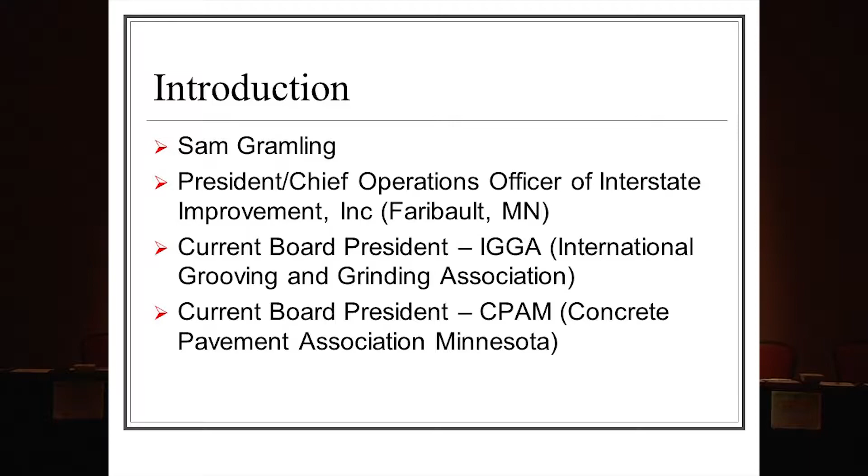As she mentioned, right now I'm the president and chief operations officer for a company called Interstate Improvement, we're located out of Faribault, Minnesota. I have had the honor and the privilege to work with almost every DOT that's represented here, I think with the exception of maybe Kentucky and Tennessee.

I'm kind of pulling a little bit of an audible on what I was originally going to discuss. I have a rather lengthy slideshow here of do's and don'ts on concrete repair, but to be honest, I stole pretty much the entire slideshow from the IGGA. The IGGA is actually represented here for the rest of this week with Mr. Larry Schofield, who's not in the room right now, but we'll have an exhibit set up across the hall there, and he's kind of the show pony for that sort of stuff. I'm not, I'm a contractor, so I'm a little more deliberate and straight to the point.

So what I really want to do here is breeze through a lot of these slides and probably just click through them before you even get a good look at them. I can make this presentation available to anybody that wants it. Tonight after I'm done, I plan to sit with Mr. Schofield over at the IGGA table if you have any specific questions pertaining to the kind of work we're looking at doing.

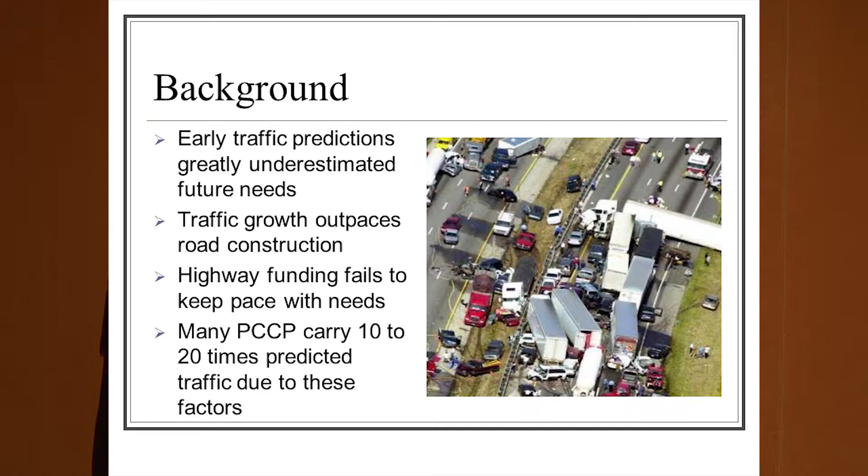Just a little bit of background, kind of the theme of what everyone's been talking about here so far. Obviously our infrastructure, we greatly underestimated our future needs. We're left with what we're left with right now. Our growth is outpacing what our road construction is able to do. Our highway funding fails to keep up with the needs that we have, and we're carrying a lot more traffic for a lot longer than what was anticipated.

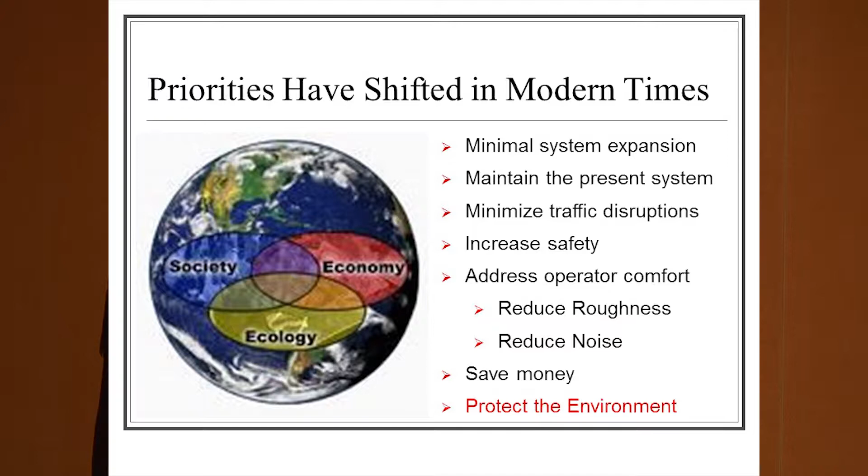We've seen a shift over the last few years in terms of what is prioritized for certain projects. The message I want to get across is that when it comes to concrete repair, we're fairly undermatched compared to asphalt and other aspects of our industry as a whole. But we are not absent at all in terms of how these priorities have shifted, and we certainly can provide certain things we need to do: increased safety, added operator comfort, save money, protect the environment. These are all focuses we're pursuing as an industry, as well as some of our competitors.

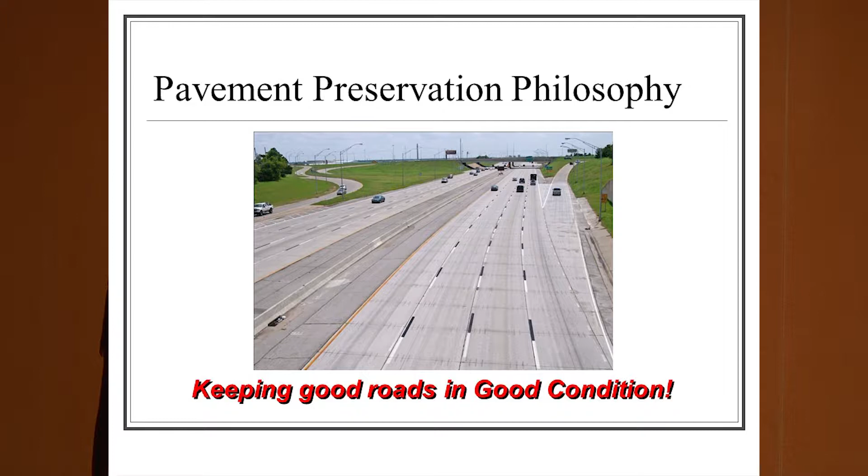The big thing here is that pavement preservation philosophy is keeping good roads in good condition. If you were to reach out to myself or most of my competitors, and they tell you they can fix every road with these techniques, they're lying. It's that simple. These are techniques that are very specific to certain types of roads and at certain points in their life cycle.

So if you have questions, what I'm urging everyone to do is reach out to myself, to my competitors, to the IGGA, to the local ACPA chapter, and ask these questions during the design phase. Ask them early and ask them often: hey, I have a specific project I'm looking at, and I want to know if it's a good candidate for concrete repair.

I've been to dozens of places around the country, meeting with dozens of engineers well before there was even a project that existed. And I've walked out with some of my competitors, and it pains me to say, who are equally as capable as I am or my company is. We've physically walked the roads and been asked, well, what would you do here? What do you think about this? Can we do something like that?

Simple questions like, looking at this road, what are some things you guys could suggest that would save us money but still give us the end result we're looking for? Still give us that 15, that 20-year fix. And we're more than happy as an industry to certainly explain that.

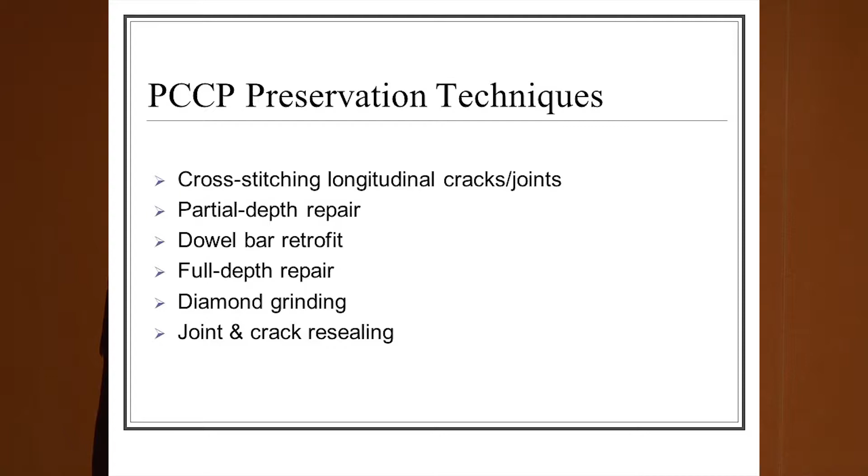There is also undersealing and slab jacking that generally falls into those preservation techniques. It's not something I do, and it's not something I know a whole lot about, so I'm not going to claim to know anything.

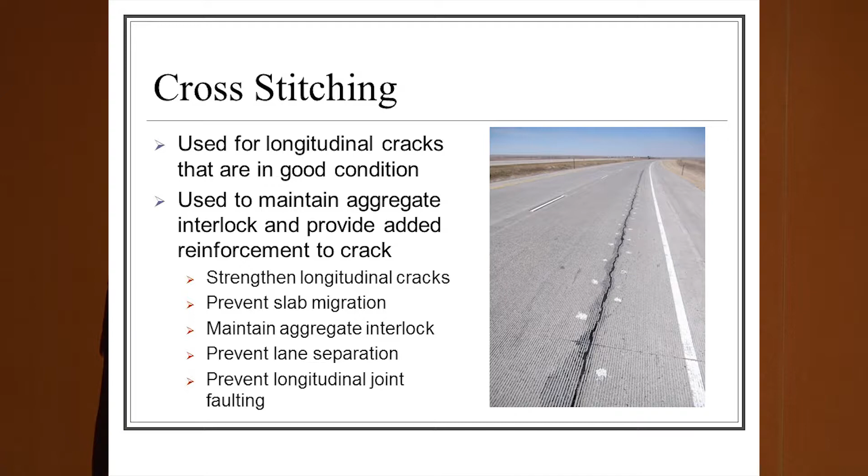Just a couple of quick things here on cross-stitching. You can see there's a list of what it does. The key word is that it's used to maintain aggregate interlock. If the interlock is already gone, the cross-stitch is pointless. It's not going to give you the design fix it's supposed to. If you have a longitudinal crack that's already an inch wide, the aggregate interlock is completely gone - either repair it or seal it and hope for the best. It's really that simple.

These are the sort of questions and pictures you can ask myself or the IGGA when you're in the design phase of something. I'm just going to breeze through these standard drawings because I want to avoid the technical aspect of it. Larry Schofield, who's in the back of the room, is the guy you want to talk to for specific questions like that.

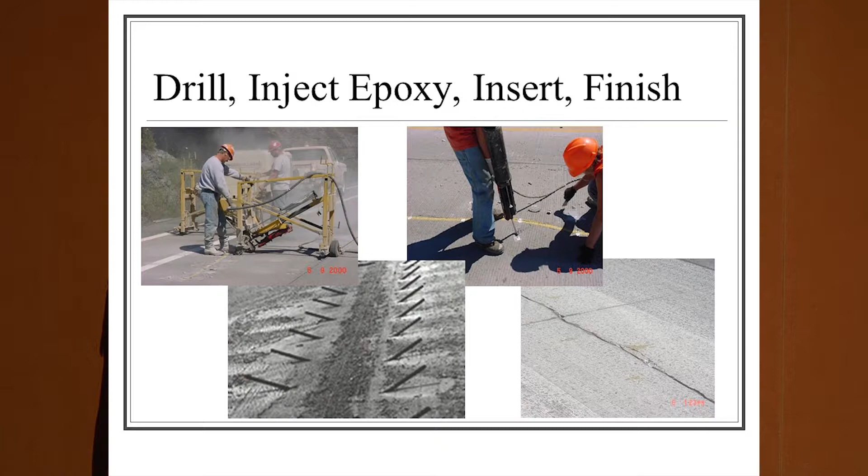As you can see here, they're just drilling - they've drilled in along those cracks. If you look at the top right corner where they painted the yellow crack they're stitching, notice how tight it is. Notice it still has the aggregate interlock - everything is still there. If that's one of those gaping cracks, we've done it differently.

We've done longitudinal joints where an on-ramp meets the main line, built after the fact. The interchange was built later and never tied to the main line, and it drifted to 1.5 or 2 inches wide. It'll hold temporarily, but it's not the 15-year or 20-year fix. The understanding needs to be there that it's not the 20-year fix you think - it might be a 7-year fix.

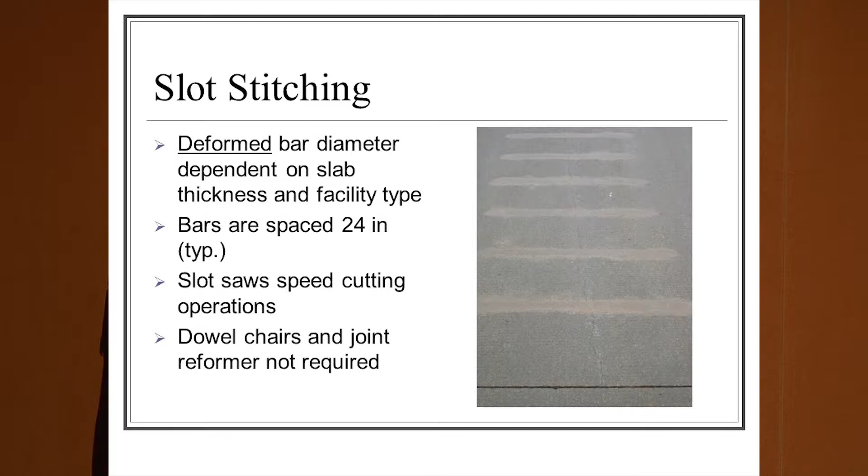Slot stitching is another form of cross stitching. It's usually quite a bit more expensive because the slots have to be sawed in and then hammered out, as opposed to just a simple drill in.

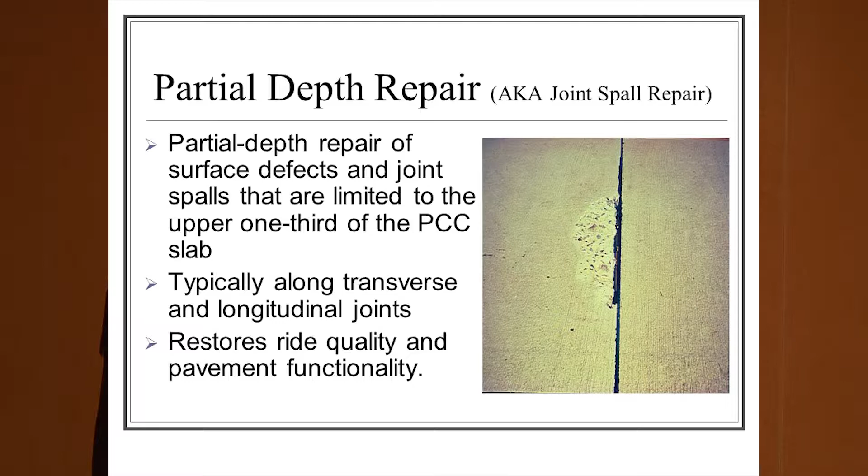Partial depth repair - something to look at here is the upper one-third of the slab. Too often when we're out doing partial depths around the country, we tend to see people wanting to use the partial depth repair as a fix that goes well beyond that.

If we don't do initial sounding of the concrete to see what's actually there, what happens more often than not is we mill it, saw cut it, start jackhammering it and opening it up, and it goes from a 3-inch repair to a misshapen V-shape down to the subgrade. We've gone from just a partial depth repair to basically doing a full depth repair using the partial depth model. It's costly for both the contractor and the owner, and it doesn't give you the fix you're wanting.

The best thing is really looking at it in the design phase - sounding the concrete, doing some core drills, whatever needs to be done to know what you're dealing with. It gets pretty expensive when you're dealing with the contractor already on site, realizing you need to make changes because you're well past what you thought you were past.

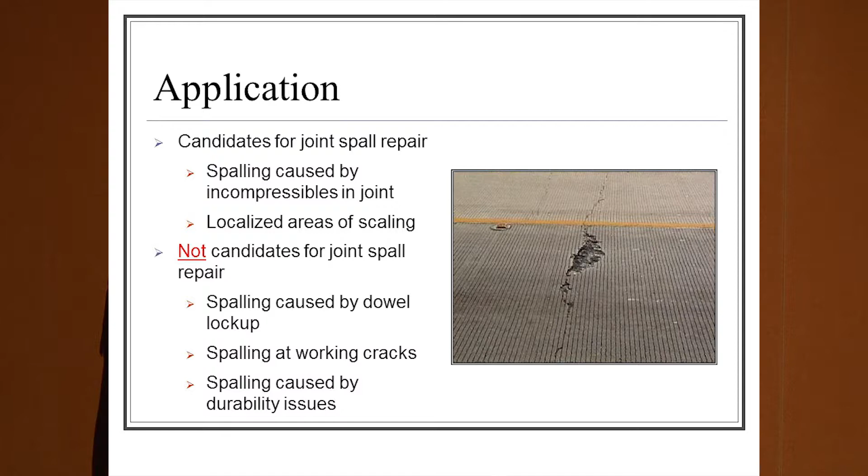Spalling caused by dowel lockup, spalling at working cracks - these are not good candidates for partial depth repair. A lot of projects I've been on involve pavements that are 50 or 70 years old, and we're doing a partial depth repair. It shouldn't happen - it's not the right repair for that type of application.

We're working on a project in South Dakota right now where they used a dowel bar inserter during the paving process, which came out 15, 20 years ago when they first started. Now they've got dowel bars locking up everywhere. Most of their joints are locking up, and they've got us out putting partial depth repairs on them. If we're filling in a spall created by a locked joint, the spall's not going to last. If you don't fix the locked joint, it's not going to last.

It sounds simple enough, some common sense things there in the design phase, but unfortunately when budgets are brought in and really looked at, they go, okay, well, we just need to put a Band-Aid on it. Well, it's certainly capable of doing that, but you're not going to get the 15 or 20-year fix.

So during that design phase, if you're talking with a contractor or an organization, reiterate what you're looking for. If you're looking for that 20-year fix, the industry should be honest enough to tell you whether or not you're going to get it, and they should give you a pretty good idea of the dollar amount it's going to cost on a certain section of road. I'm certainly pretty open on those sort of things with owners that have reached out to me and said, this is what we're looking at.

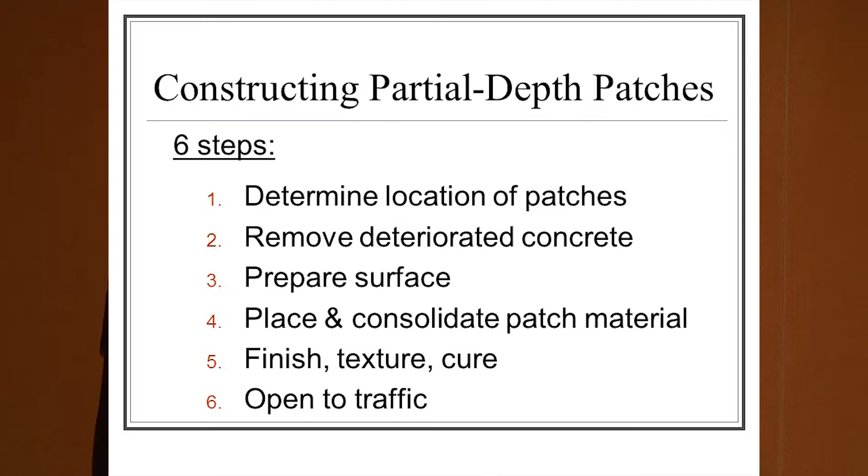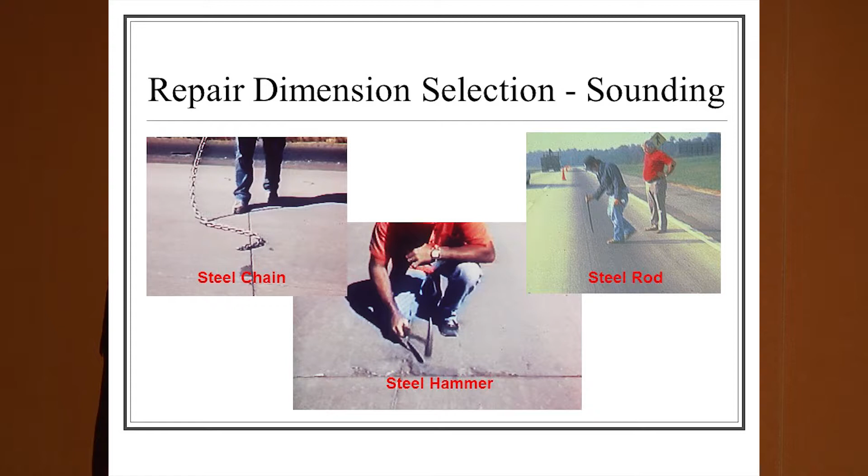To be honest, it's not even a skill that I'm very good at. I've done it time and time again, but cores are much more valuable. What we've seen, if you take a particular road and look at a joint where you'd visually say, I believe this could be a partial depth, it looks like a little bit of surface deterioration—let's go ahead and core it and see what's happening.

Sometimes you end up with the bell shape where it looks okay on the surface, and by the time you get down to the subgrade, it's completely void. There's all sorts of different things: how often has it been sealed, has the sealing been maintained, was it ever sealed at all. All of those things are going to tell you what's actually happening below the surface.

But if you do a core and this one looks good, you can safely assume that further on down it's going to continue to look good. This was all poured the same time—it can't be an anomaly that this is just the top 3 inches of our 9-inch pavement.

If you take a core and that runs all the way through, we go back to the drawing board. We figure out ways that we can do the repair, still keeping it a repair, still keeping that life cycle that you want out of it, and at least somewhat keeping it in budget. Again, during the design phase is so much better to do this. With the repair dimensions, they always talk about trying to go a little bit beyond that.

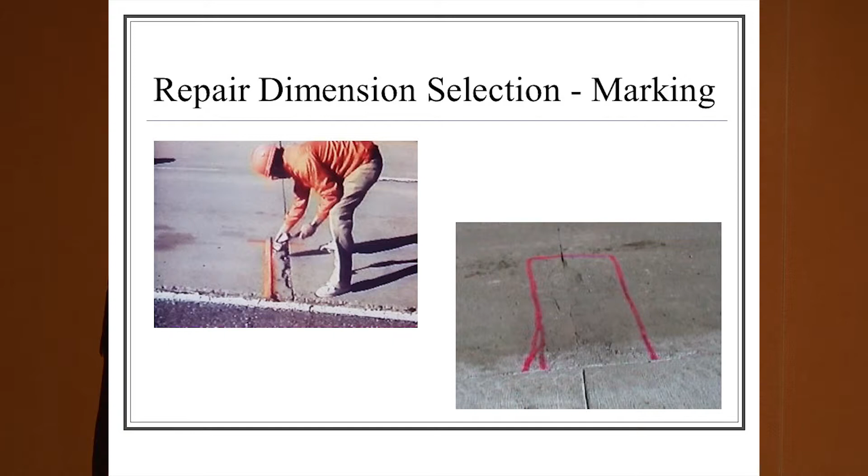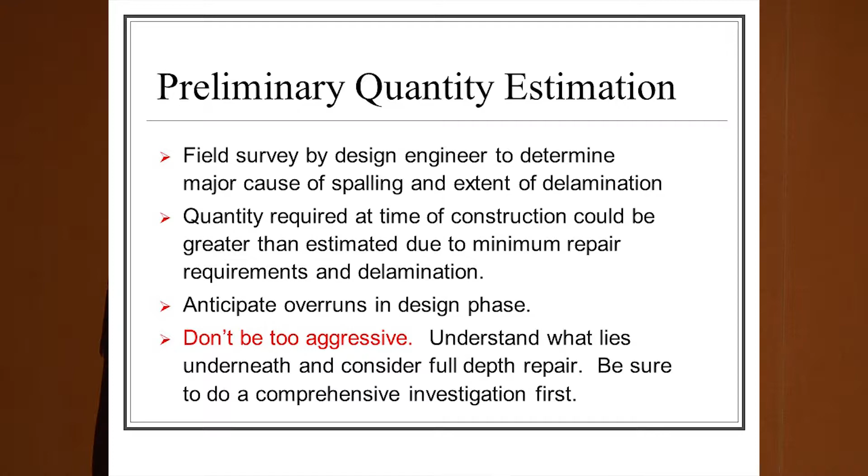Takeaway here: don't be too aggressive with partial depths. There are a couple of different ways you can perform them. Number one, you can saw cut around them and jackhammer out. The pros to that are very little spalling around the pavement, and most crews you're going to find are more than capable of doing that.

The cons: you've got some water and slurry, and in our industry that's a nightmare to deal with. The water is there and has to be contained somehow.

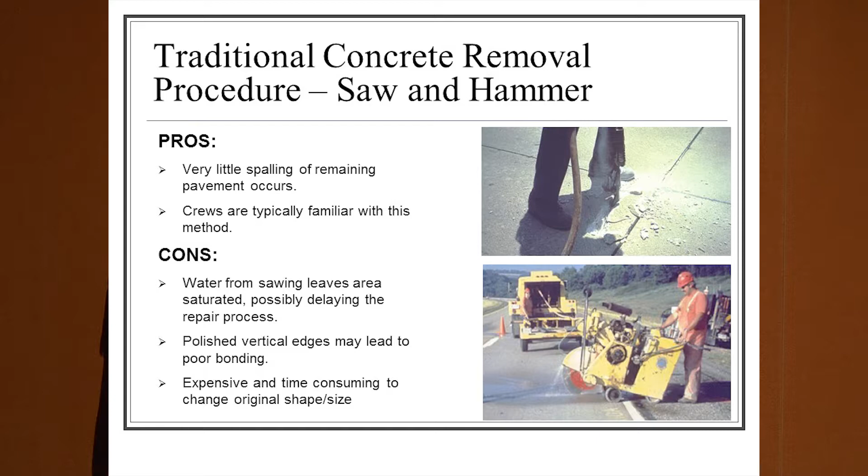There's some polished vertical edges when you saw cut. You polish the aggregate and everything else, and that leads to some possibilities of poor bonding. And they're expensive and time consuming to change. If you find out after the fact that you didn't mark near enough of the deteriorated concrete, it's expensive to bring saws back, resaw, everything else.

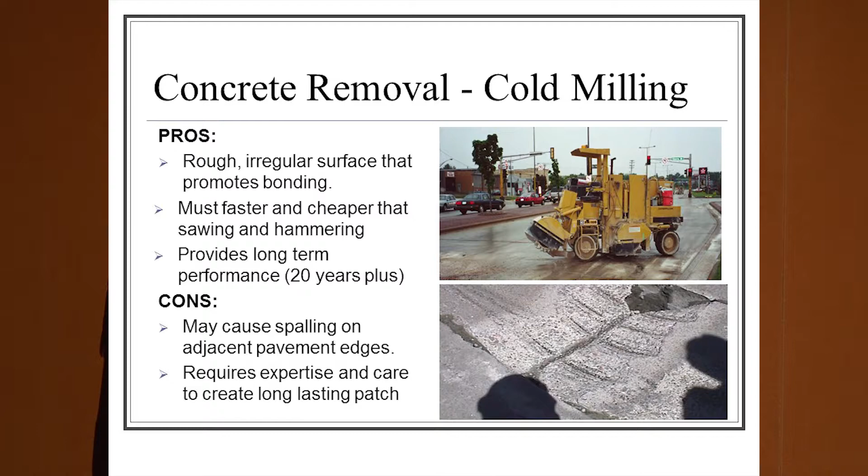The cold milling leaves a rough, irregular surface that promotes the bonding you're looking for. It is quite a bit faster and cheaper, it's just not as common. So when you look at the cons, it's really not as common. There is some spalling that will happen along the edges, but even those slurried correctly and poured correctly, the chipping and spalling goes away as well. But it's just not as common.

I'll skip that. Irregular shapes are acceptable doing partial depth repairs.

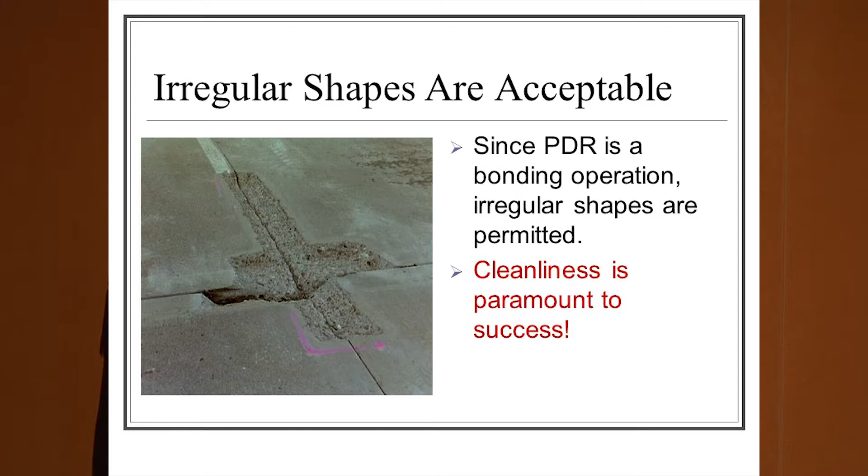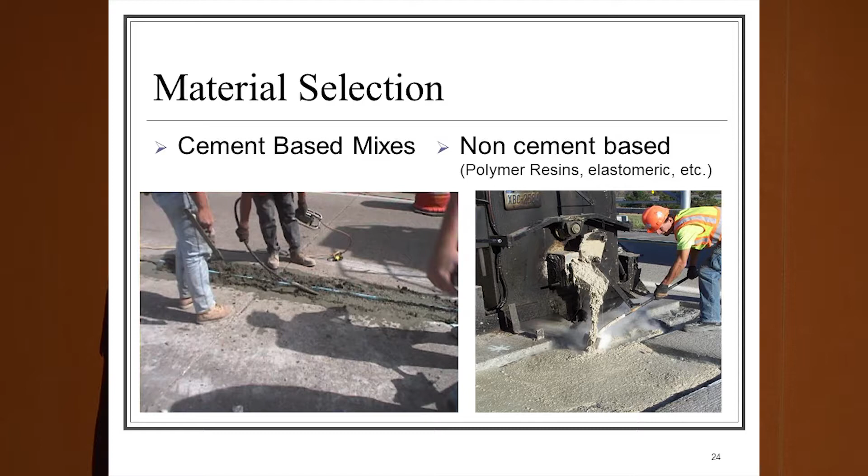You can do a cement-based mix or a non-cement based. Cement-based mixes are definitely cheaper. The non-cement based mixes are more expensive, but they offer greater flexibility. They typically will last not necessarily longer, but they'll last the same type of many years that you're looking for.

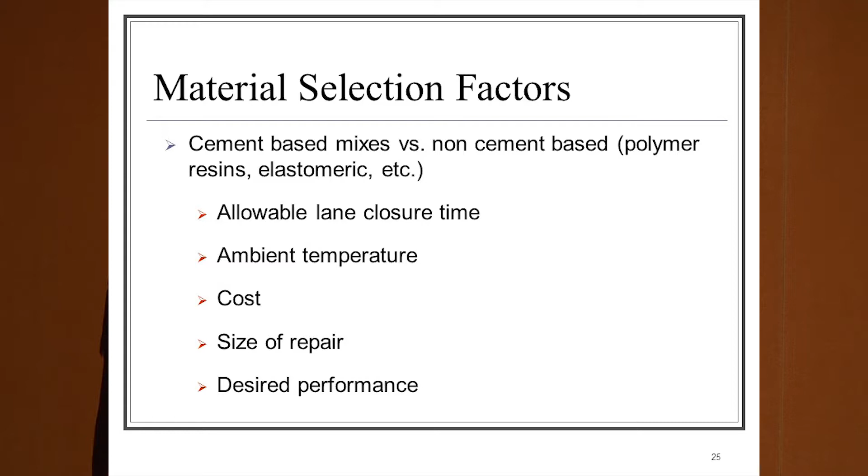The 15 to 20 year mark is what we kind of always peg for these types of repairs, but they are considerably more expensive. Sometimes they're a necessity when you're looking at things like the shortened work windows that we're dealing with now, night closures, stuff like that. Anytime you can stick with a cement-based, your costs are going to come down, but you lose some of that flexibility in terms of your working restrictions, your time frames, that sort of stuff.

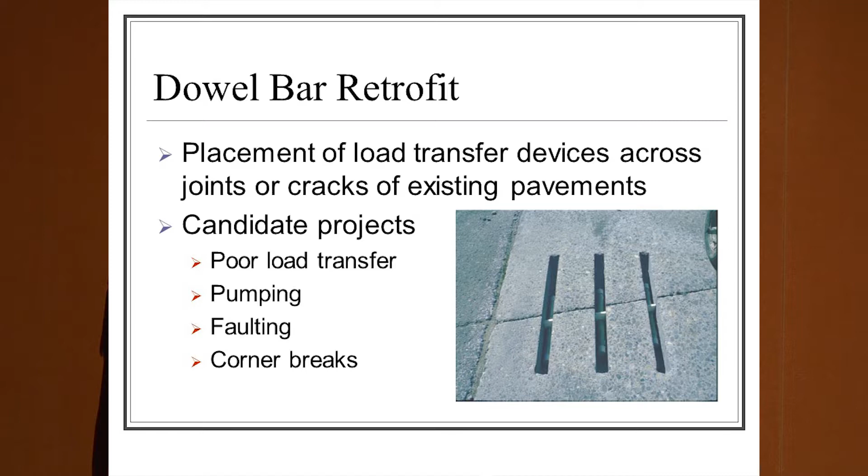Dowel bar retrofits is probably one of the biggest issues in terms of our type of work, that without the economy of scale, it almost prices itself out. To go in and take a 15-mile road and say, you know what, we've got a handful of transverse cracks that we want to just make working joints, we want to put dowel bar retrofits in them.

Indiana is a state right now that's doing a lot of them, we're going to put 1,200 of them on this job. This takes specialized equipment. It takes a specialized saw to saw those slots, and some skilled laborers to hammer those out and pour those retrofits. Doing 1,200 of them, you're basically shooting yourself in the foot instead of doing just a full depth patch and making it a working joint that it wants to be.

With the economy of scale, this is a type of fix that needs to be a mass production. This is something where we have jointed concrete, but it's un-doweled, and we have that poor load transfer on a series of joints through the course of a stretch of road. You put this out there, and you can get some pretty competitive bidding, some pretty competitive pricing on it.

It's not to say that you can't, but the last round of bidding on the Indiana DOT, I think the average bid price for the dowel bar retrofits that were coming in, 1,200 dowel bars, things like that, was around between $85 and $95 a bar. We're putting 33,000 dowel bar retrofits in Grand Forks, North Dakota right now that are coming in at about $32 a bar.

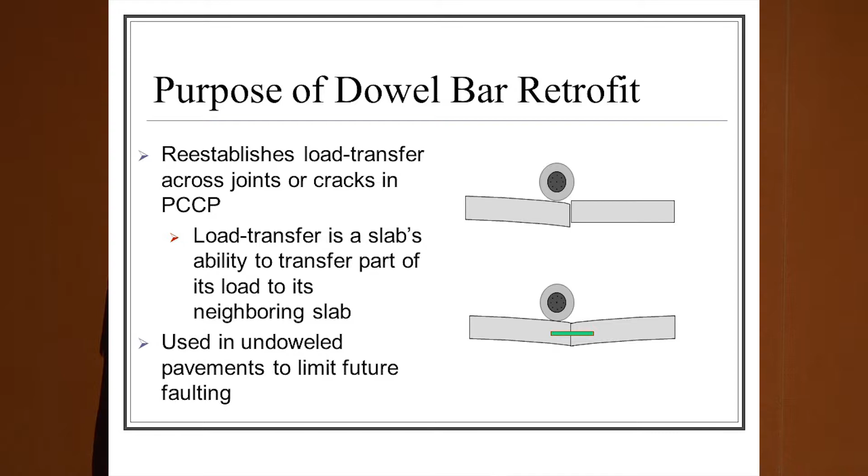The purpose of dowel bar retrofits is to reestablish the load transfer. Something I'll get to later with diamond grinding, I'd highly recommend that if you're going to do dowel bar retrofits, you diamond grind it as well. It should be a one and two thing there.

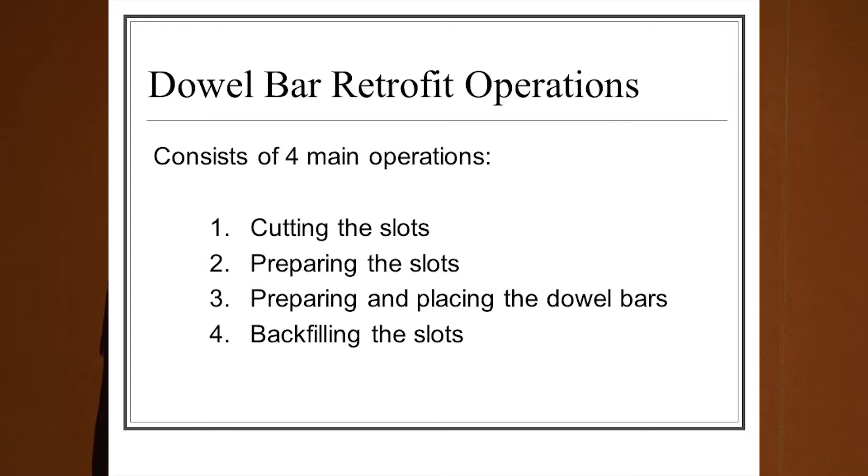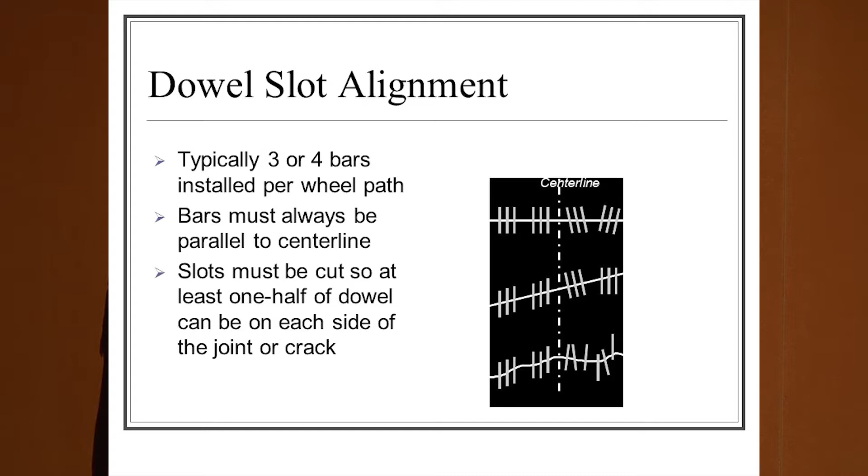There are four main operations: cutting the slots, preparing and placing the dowel bars, and backfilling the slots. The biggest thing is making sure the dowel slots are aligned properly. A crooked slot, putting in a bar crooked, defeats the entire purpose. You're taking a joint that has poor load transfer and locking it completely, basically forcing a point that wants to blow up. So in terms of inspection, make sure they're doing it correctly.

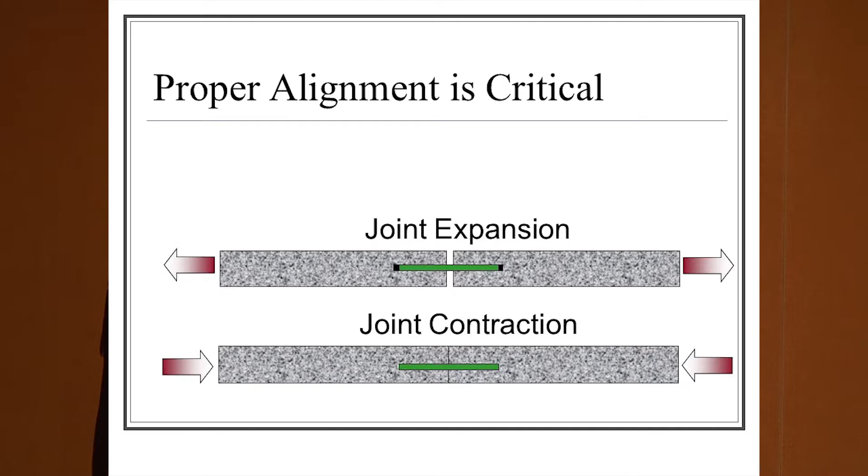Make sure they're cutting with a gang saw, not one slot at a time. You should be cutting three slots at a time with the saw that's measuring off the center of the roadway. And it should be straight, running parallel with your center line so that everything works appropriately. Again, the alignment is critical.

You can do it on transverse cracks. You can take that and make it a working joint, but make sure the cracks aren't too far gone, that it's not full depth. If it still has that aggregate interlock and everything else, you can make that a working joint. It obviously cracked there for a reason. It wants to be a joint.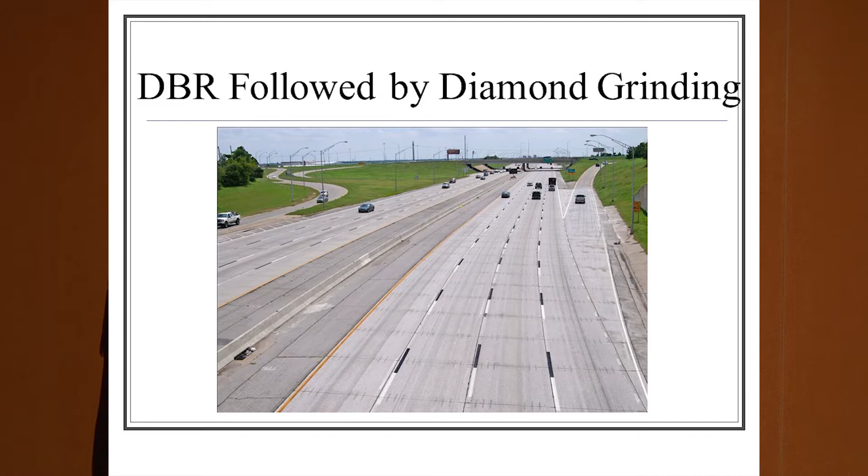Again, as I mentioned, dowel bar retrofit followed by diamond grinding is really key. The best way to do a dowel bar retrofit when finishing is to finish it high. It needs to be finished a little bit elevated from the original pavement so that it doesn't pull away from the side of the slots.

And if you're going to finish it high, you're going to want to grind it off, and you're going to want to take that load transfer, that faulting that you see in a joint, off after you put the retrofit in. That's the best way to optimize the full life of the retrofit patch.

I'm going to skip through the Washington State dowel bar retrofit research.

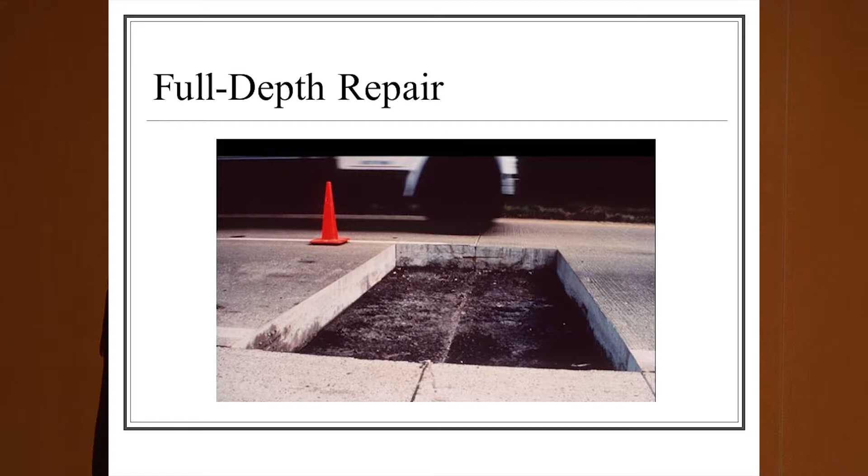Full depth repair. Full depth repair is obviously the best type of fix we can do. If you're given an option between partial depth, dowel bar retrofit, simple joint sealing, cross stitching, slot stitching, or full depth, you want full depth. It brings it to the subgrade. It will be your longest fix.

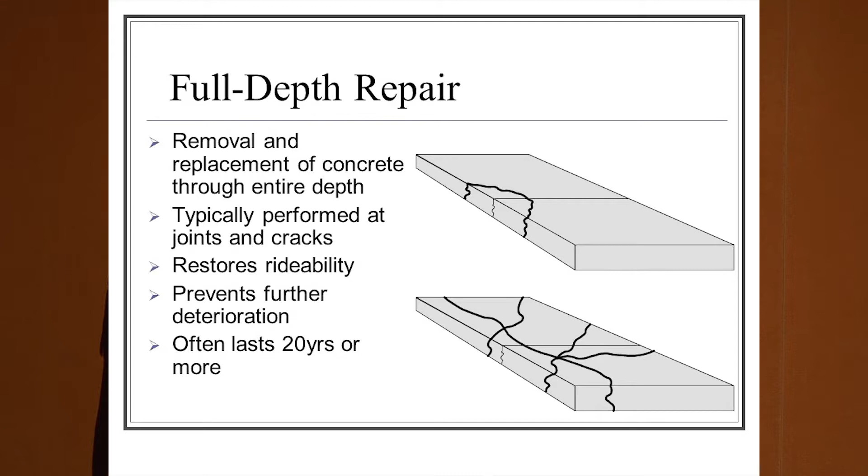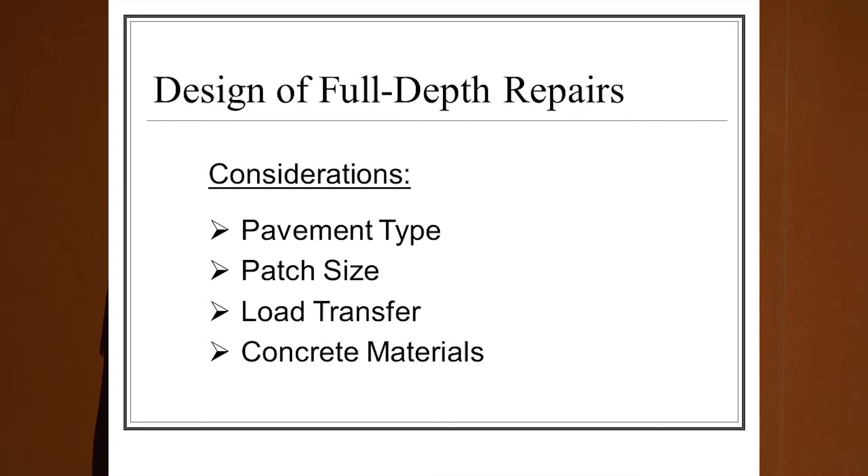And again, economy of scale. There's a lot of equipment that goes into patching and replacing these, and it's an amazing amount of dollars that we can save when you're talking about this economy of scale. If you're running through multiple panels, or on either side of a joint with some bad concrete, your best case scenario is to do a full depth patch.

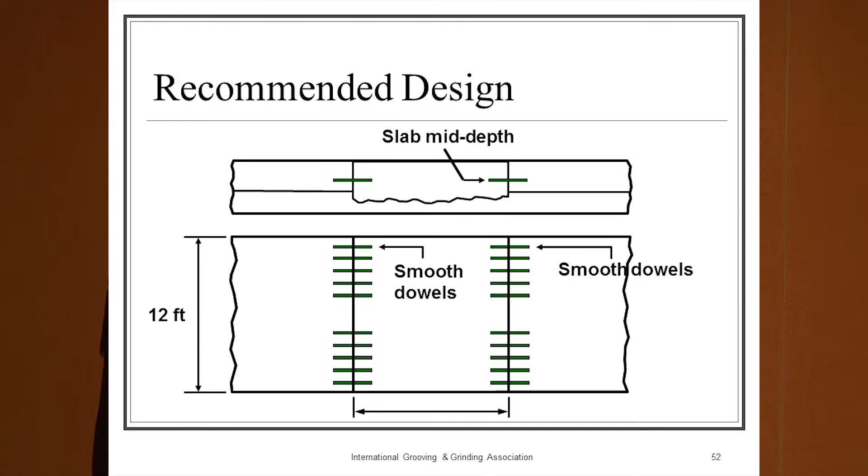Some considerations there: your concrete materials, smooth dowels. One thing we switched to in Minnesota is putting smooth dowels on both sides of your concrete patch. The reason is, why lock one? Concrete has to move, it's going to move no matter what you do. So you double your success in creating working joints, making sure everything is aligned, by putting smooth dowels on either side of it. If you lock one side, that becomes your only working joint.

Going back to the South Dakota project I brought up before, they have a stretch of road we're working on where, like I said, they use the dowel bar inserter. They've got bars all over, they've got lock joints. Their specification calls for, if you install a full depth patch on a mid-panel crack without using an existing transverse joint, you put number 9 or number 10 tie bars on either end of that patch instead of smooth dowels.

Last week we poured, and four of our patches cracked almost within a day. We hadn't even opened the roadway up yet. It's because of this issue with the dowel bars and lock joints—we put in new, fresh lock joints, and we don't know if it's the 10 joints before it, or 10 joints after it, or 1,000 feet, or what, but everything is locked up within there, and with that weak spot of concrete trying to cure out, that's where we're seeing everything fall apart.

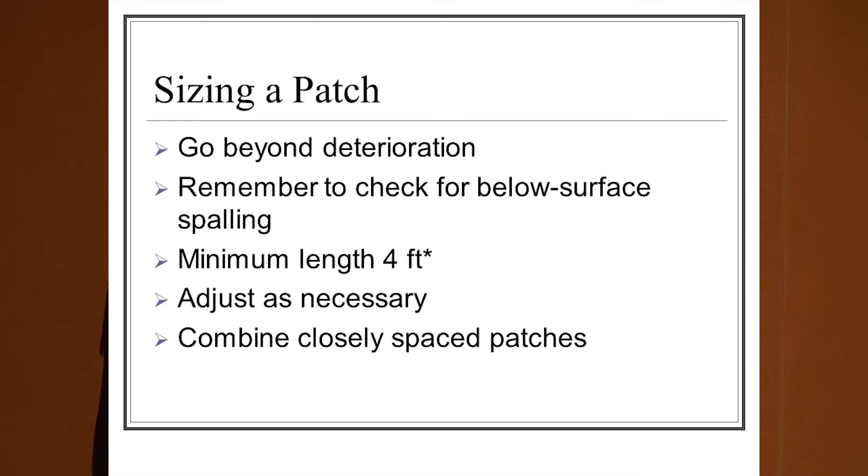The sizing of the patch should go beyond the deterioration. I would also urge going beyond the existing transverse joints. If there's existing dowel bars in it, cutting through those and trying to drill next to them and epoxying or grouting in the bars is a mess. If you're looking at an 18-inch bar existing within it, go a foot beyond that existing transverse joint, so that you're drilling into fresh concrete. It doesn't matter if you're drilling into deteriorated concrete—it's already deteriorated with 8, 12 inch, and inch-and-a-quarter, inch-and-a-half dowel bars in it. So go beyond it and take a little bit more. The minimum length at 4 feet.

Perfect example: Travis and I worked on a project for the West Virginia DOT, and I believe the standard specification was 6 feet. There were a lot of partial depths that we had figured for that project. When we got out there, it was too far gone—the partial depths were too far gone. It wasn't going to be the fix that they wanted. They were investing a lot of money in concrete repair, followed by diamond grinding and joint sealing.

They were running the whole gamut because they didn't want to touch the road for another 20 years. We met, we discussed it at length, and one of the things we suggested was, hey, all over the country we do 4-foot patches, we don't do 6 foot. I know you have a 6 foot minimum, but if we're looking at an area here that's got some bad, what you wanted to do as a partial depth—a 2 foot wide partial depth going all the way to the subgrade—a 4-foot full depth patch is better than doing a partial depth that isn't going to last.

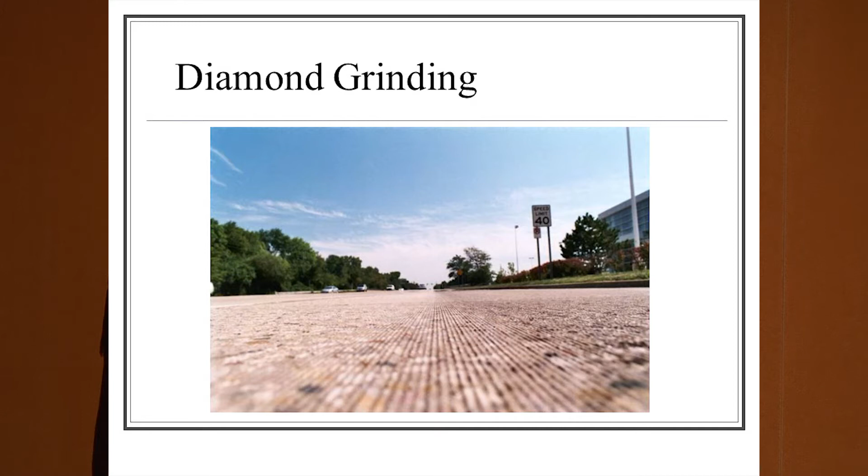To eliminate that faulting, to take that thin layer off of everything, to clean it all up, if for nothing more cosmetically, to have the traveling public not see that quilt-looking patchwork of stuff after it's done, even if it rides like glass, diamond grinding makes cosmetically looks very appealing and has so many different beneficial factors in terms of the friction we're looking for, that we're going to continue to push, getting listed as an alternative to that high friction surface treatment. But there's a lot of definite benefits to diamond grinding, especially when you have a 50 or 60-year-old pavement.

Just some pictures of a fine surface of it, what it looks like. You can see that corduroy look.

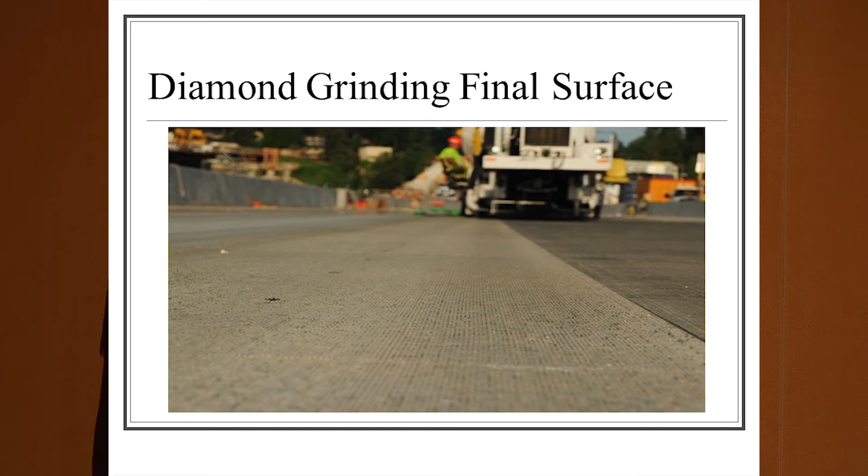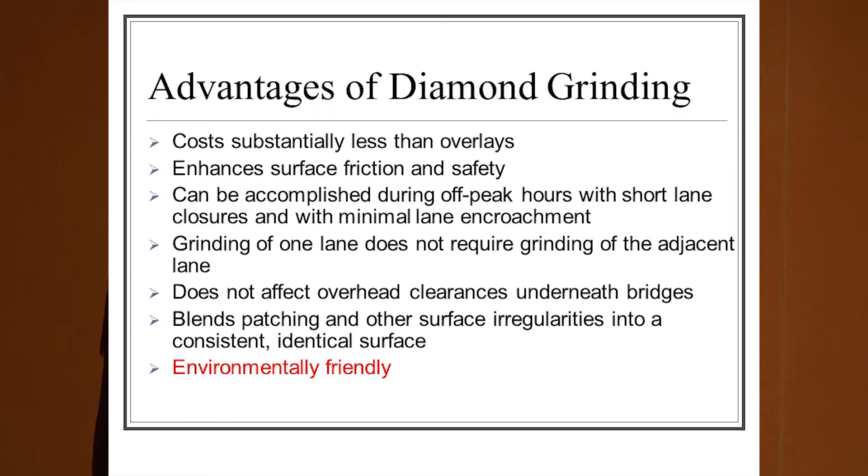I'll just kind of hit on a couple of them. They do cost substantially less than overlays. If you were to jump on a concrete roadway, I know it might sound crazy, but if you were to jump on a concrete roadway that was only 15 or 20 years old, instead of 50 to 70 years old like we're currently doing, but if you got on a concrete roadway at 15 or 20, did a couple of minor patches, and diamond ground it, the extension of the life of that would certainly get you into that 50 to 70 year range in terms of your overall life cycle.

It would give you that 30, 40 years that you're looking for. Even doing a minor or major repair on the 50-year-old roadways and diamond grinding afterwards ensures that 15 to 20 year fix. Takes away all of that faulting, takes away the noise that people don't like about concrete, takes away so many different things, and really provides a smooth, nice transition road.

Again, you can see some of the problems that's addressed with this.

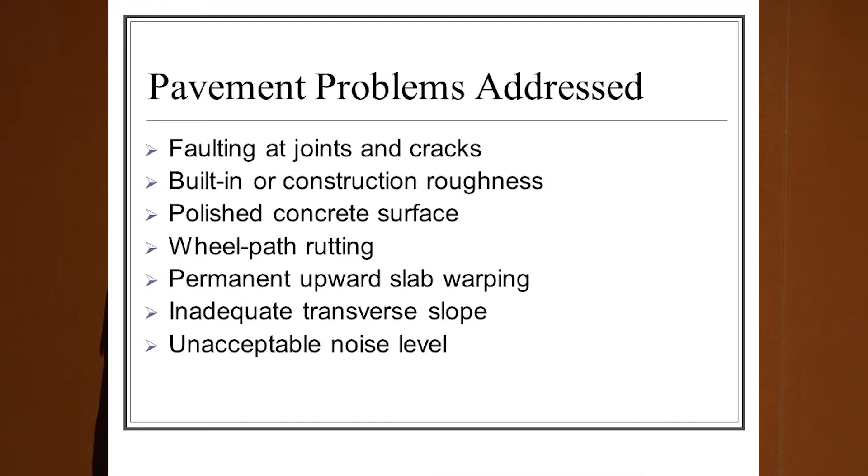Contrary to what some people might think, we can diamond grind asphalt pavement. We do it on almost every project when we have to feather grind into the shoulders, when we have to grind through the taper from the transition from asphalt to grinding. So it is another avenue to look at. And again, the unacceptable noise levels of concrete, the grinding all but eliminates that.

There's a next generation grinding surface that I could talk about for hours as well, but that puts us down below our asphalt competitors in terms of noise.

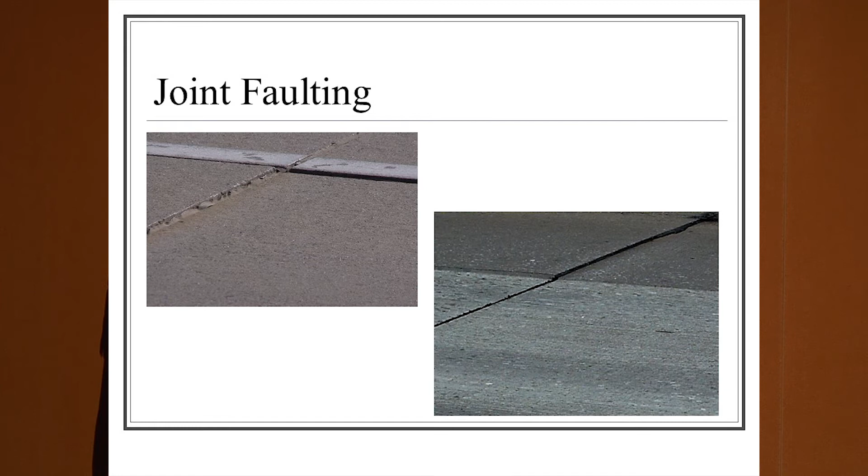Eliminate that joint faulting that you see here. That's the big thing with the diamond grinding. And it preserves the pavement by not having those heavy trucks that we have so much more of running on these interstates now get hopping. You don't see the black marks from the trucks bouncing over everything.

We can usually provide a 60 to 70% improvement over the pre-grind profile of an existing road.

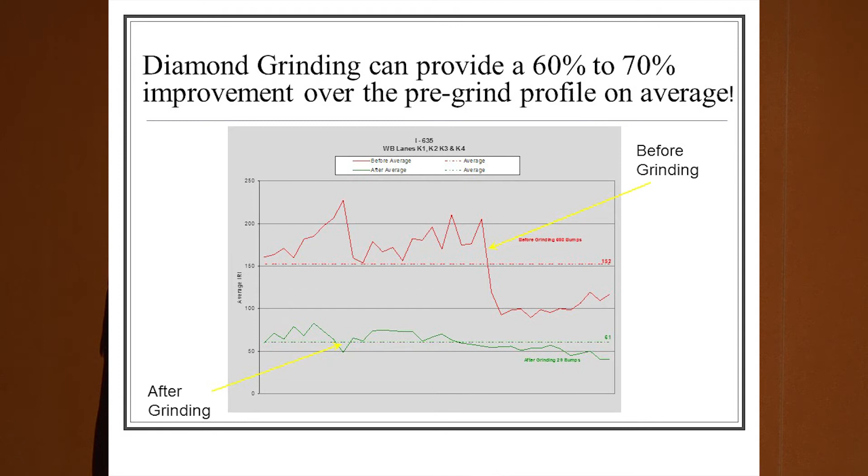And if you're looking at wanting to discuss average pricing on grinding, on what you think a square yard would cost, that's the phone call that you make to the IGGA or to myself or one of my competitors, and you just say, hey, I'm looking at 100,000 square yards, I'm looking at 50,000, I'm looking at 400,000 in this type of an area, and our industry will ballpark it for you. We'll give you a very conservative estimate that allows you something to go off of and continue with that design phase.

And a little bit of a hint, as contractors, even though we're spread out all over the country and we might come 1,200 miles to do your work, if there's things like concrete repair, diamond grinding, joint sealing, we have to show up, we have to look at the project before we bid it. So asking us to come out on our own dime to sit down and meet with you to discuss a potential project that might be designed is not asking too much, because we're going to come out anyways.

If you advertise it in two months, I'm still going to have to fly out there, drive it, look at it, measure joints, that sort of thing, try to determine, look at how hard the aggregates are. I'd rather just do it with you and with some of my competitors.

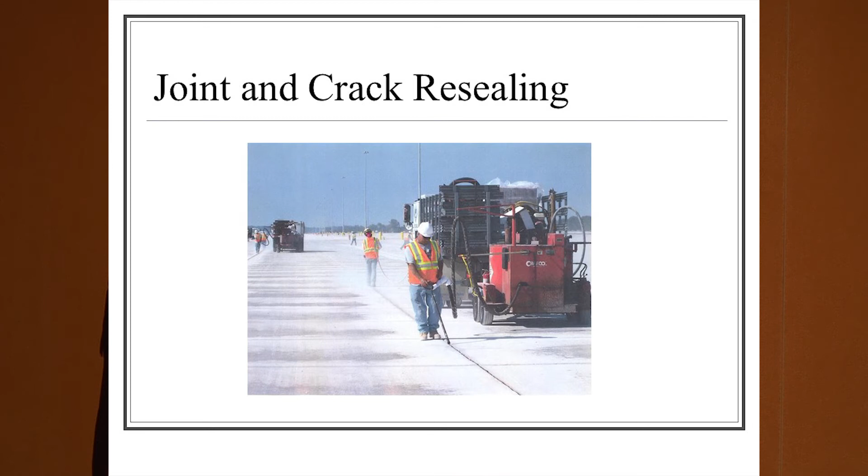Joint and crack sealing, I'm going to kind of breeze through that because I am running way over on time. Guidelines for resealing joints: if you continue to reseal joints, if they are originally sealed, they were sealed for a reason.

Last thing I have, controlling the costs. If you know the history of your road, things like that, it was designed with a faulty dowel bar inserter, that sort of thing, know that history. Know what you're looking to get out of it. During the design phase, investigate, do the coring, really look at things so that we're not surprised when we go out there.

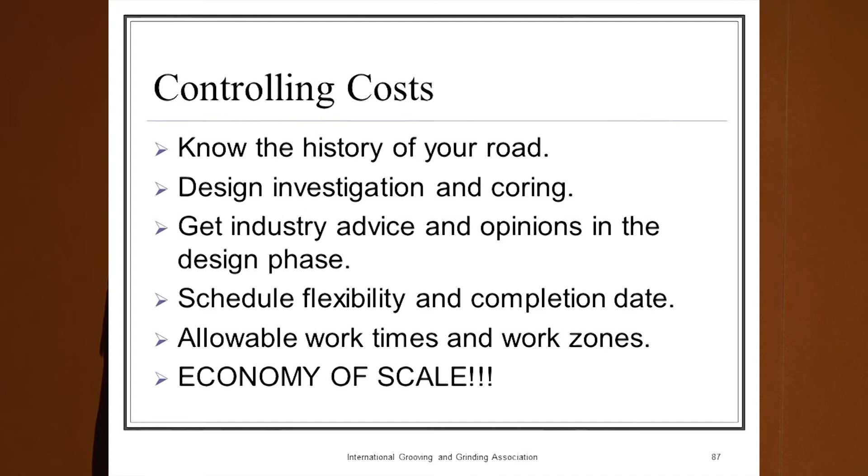And be conservative with your estimates. Allow yourself a little cushion, because I'm sure you guys know more than I do that what you design and when you actually get to build it could be years apart. And concrete, if it needs repair, it doesn't magically fix itself, and it doesn't completely stop either. It starts and it continues to go.

Schedule, flexibility, completion dates, those sort of things go a long way when it comes to the pricing you're going to get. There's a huge influx and discrepancy in pricing all around, based on giving that schedule flexibility, your allowable work times, your work zones. We're volume contractors. We need to get a certain amount of volume, a certain amount of cubic yards poured every shift. Otherwise, we're not making money, and if we're not making money, we're not delivering the product you guys want.

Something along the lines of, when you're pouring concrete, the difference between a 9-hour work window and a 12-hour work window is probably about 50 to 60% more work getting done in the 12-hour window. That's 3 more hours that we have, and that 3 extra hours is everything. I mean, the 15 minutes is everything. That 15 minutes is the difference of 10 more yards, that's one more concrete truck getting dumped.

Different tactics - looking at a project east of Oklahoma City last year, both directions had 16-hour work windows, but you had to be off the road during rush hour. Being on the east side, going eastbound we're off the road at 3 in the afternoon till 7 or 8 at night. Going westbound into the city, we're off the road from 3 or 4 in the morning till 8 or 9 in the morning. We avoid the rush hour, but just that difference is cutting the project duration in half, cutting your guys' costs in terms of the number of people you need out there inspecting, the time you need to be out there, in half.